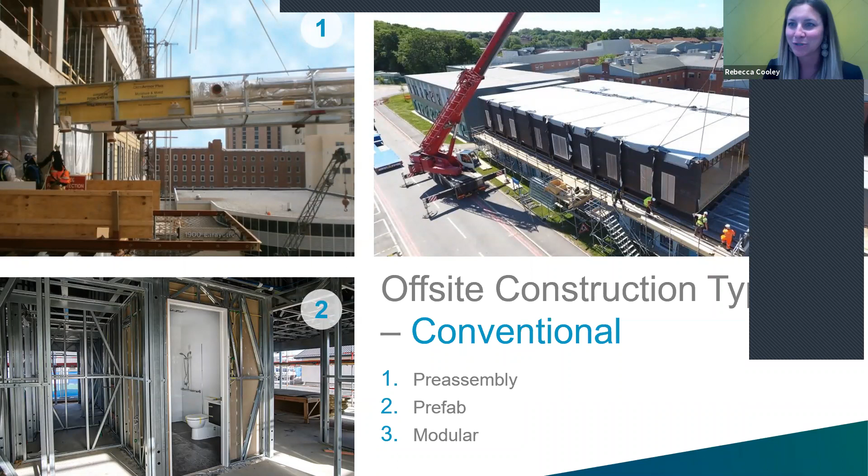The last item on the right is a modular approach, where we're taking an even larger section of that building—here they've pre-assembled almost to the size of shipping containers that they deliver and put in place. These are all different types of off-site construction, but they're not actually consolidating the trades—they're using the same number of trades, just coordinating them off-site instead of on-site, which allows for some benefits, but not all.

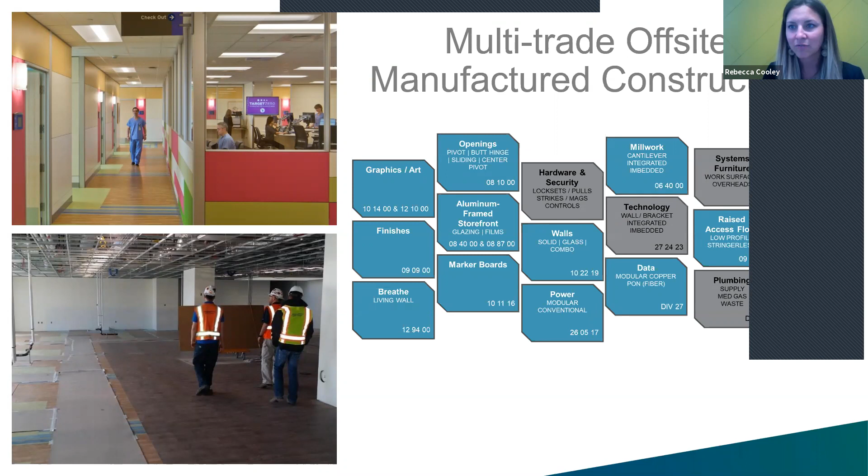Conversely, when we look at the multi-trade item in a manufactured solution, we're combining up to 15 trades through the same type of technology, so we're speaking the same language and using that technology to drive the coordination. We're not having to pull the 15 trades in to individually coordinate them, and we're streamlining that process that would normally be very time consuming. Just think about the contracts alone for all these different trades, that takes a lot of time. Then we're able to consolidate the manufacturing to one facility, streamlining processes and guaranteeing a certain fit and finish level and coordination within that process.

Why doesn't everyone build this way? Number one is people, really just change, and understanding how this process will be different and how it will affect their day-to-day life. It's a very understandable, real reason why we may not work this way.

The other is fear of perceived risk. It's interesting, I had a client, actually a healthcare client, say that with conventional construction, we have a lot of challenges, but we know what the challenges are. With this, it may present new challenges that we weren't aware of. So again, it's that perceived risk of not knowing what you don't know, and changing. And again, this all takes education throughout that process.

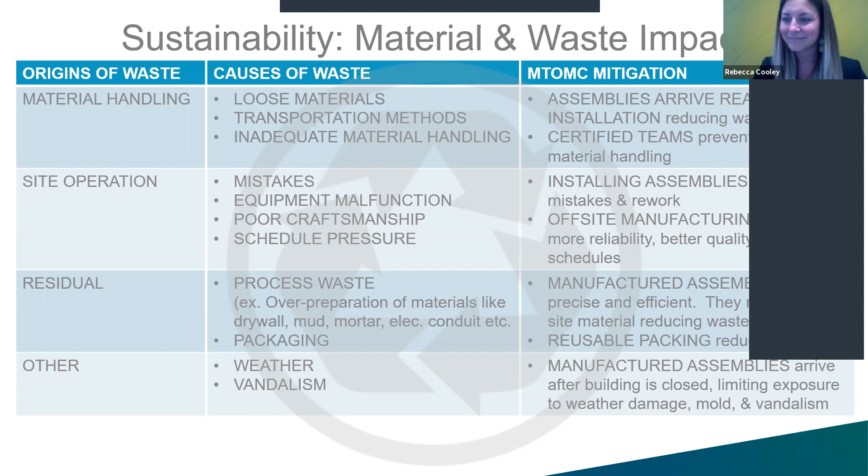Unfortunately not. Okay, no problem. That means I'm answering everyone's questions, just want to make sure that we are doing that.

So that was sustainability in terms of material. Now we're going to talk about behavioral sustainability.

We live in an environment where the way we build now, everything's conventional. So we build it to suit in a conventional manner, and it meets all of our needs on day one. You as architects are doing your best job with all of the information we have to create an environment that is going to last the life cycle of that building, so it could be 5, 10, 20 years.

The issue is that you do address all of the foreseen needs, but the problem is there are so many unknowns, take into consideration what we're going through right now, that there's no way for us to predict what will happen.

So how do we create environments that are essentially future-proof? How can we create environments where we're able to actually access the cavity, add, change, remove, physically change spaces and the way they interact and function very simply, very cost effectively, and very fast?

Obviously in healthcare there's no downtime, so the amount of time we have to take rooms offline could be essential to the community, essential to the business. How can we minimize that impact? That's what we're going to look at too, that behavioral sustainability throughout that space.

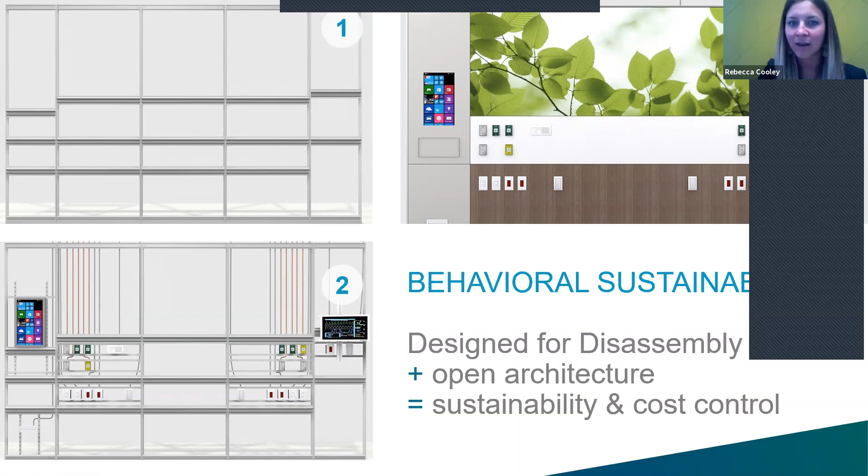Here's an example of a project for Mercy Hospital. This was actually a retrofit within their unit where they came in and wanted to provide upgraded head walls that would need new services through the space. It was going to be more challenging and more disruptive to actually cut into the sheetrock to make those changes, so they decided to do what we're going to call a curtain wall.

They just put that multi-trade offsite construction right in front of their existing wall. That means they did not have to shut down a whole wing to make this upgrade—they were able to come in and do one room at a time.

Through this space, you'll see they're incorporating those three steps I mentioned earlier. We're seeing the framework here, we're seeing the gases and services coming through the space, and then obviously the finishes and what is that aesthetic and durable surface we're using throughout that space.

This whole project had 29 rooms, and it actually only took 2 days to complete with only 4 men. So the schedule has a big impact that we're able to help drive the needs of that healthcare system, again, not being down for an extended period of time throughout that space.

So as a synopsis of sustainability: it's faster, it's greener, and it's better. I like to say faster, cleaner, smarter. The faster portion is that if we are building things in a sustainable manufacturing method, we're then using less men.

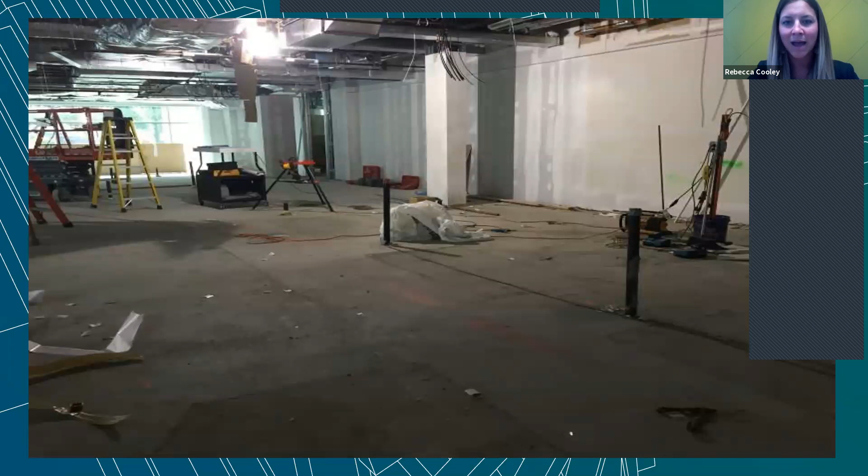On September 1st, they were cutting through and cutting out floor coring for all the plumbing needed throughout this space. It was currently a shell space, just to give you a little more background. They were cutting into the existing concrete, running all those services overhead and underneath. Now they're pouring back the slab within that facility. So that was September 1st.

So from October 31st, they have the warm shell created. It took them 60 days to go from a cold shell to a warm shell, which would include running everything overhead—life safety, HVAC, some low voltage was run. We have the ceiling grid in place and the floor covering. Now you can get a great sense of how we are impacting the other trades, from schedule savings, decreasing the waste needed on site, and also a sustainability factor.

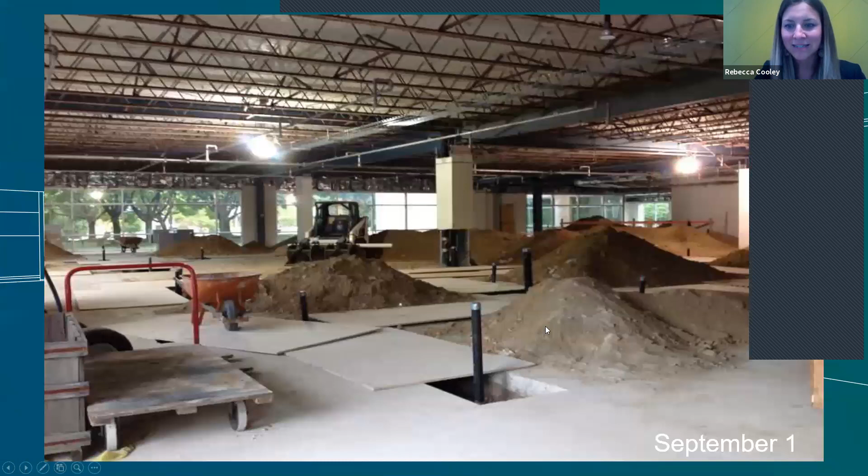So this ceiling—instead of being, let me go back to that floor plan so you get an idea. Hey Rebecca, really quick, we do have a question.

Which division are these components specified? And were all these components part of the modular headwall?

Great, yeah, let me go back to that image. That's a great question. So all of the items included in the multi-trade offsite construction are in one division—Division 13. That's under special construction. The name of the section is Integrated Interior Assemblies, and it encompasses everything that you see here.

The items that would not be included would be this monitor. This is an Epic system that the healthcare system has standardized on. So we just accommodated the blocking, the installation, and the wiring for all the AV. That's one item that would not have been accommodated.

These med gases that you see here—we are not producing these from scratch. The healthcare system would tell us what type of med gases they want to use in the space, whether it's Amico or a similar system. We would source them and then provide either a flex med gas solution or a copper solution within that wall frame. This thing came straight from the factory that way, so all of the trades are again encompassed in our factory.

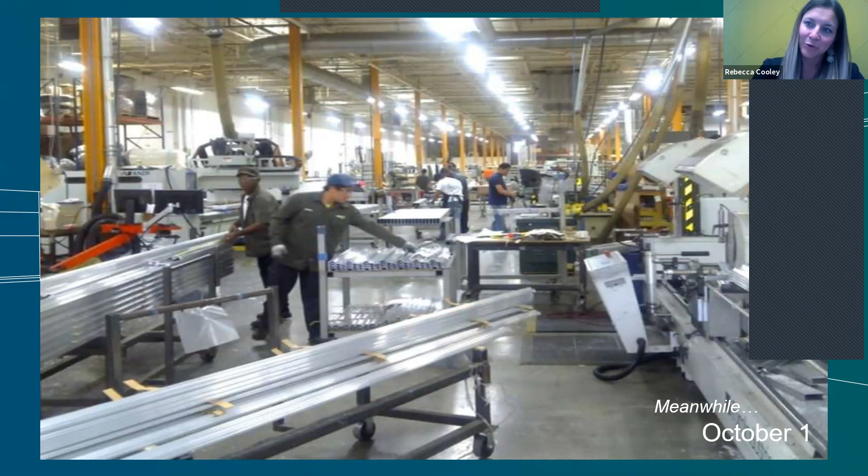We are starting on November 1st with the multi-trade onsite. Meanwhile, we back it up four weeks before that, starting to build all of those elements you see there. All of the elements in Division 13 use that technology. We're driving our equipment on the manufacturing floor, cutting all of these items and pre-assembling them.

You'll see here our framework. You can see they're putting in the insulation. They're lining up all of our power outlets that are pre-wired, and we have a plug-and-play whip connected to that.

We're then going to start on that November 1st date. We bring in all of our frames and start standing those items. So from November 1st to November 4th we have all of our frames installed. It took three days to go from completely open space to enclosed spaces.

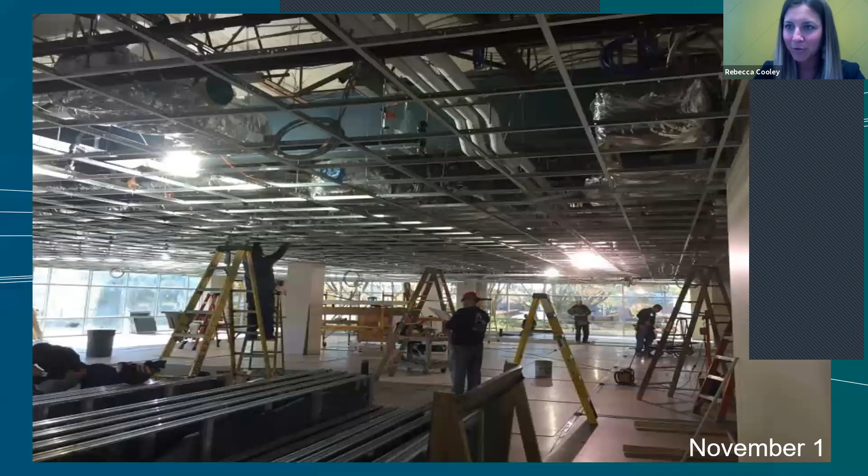This is generally when people are very worried, because normally they just like to see progress, right? And this is when people are blown away -- they're like, 'oh, I get it now.' That's part of that adoption, going through a process. We do have to take a couple steps back in order to then go ten forward, just to gain familiarity with the different process. So we've now stood all of our frames.

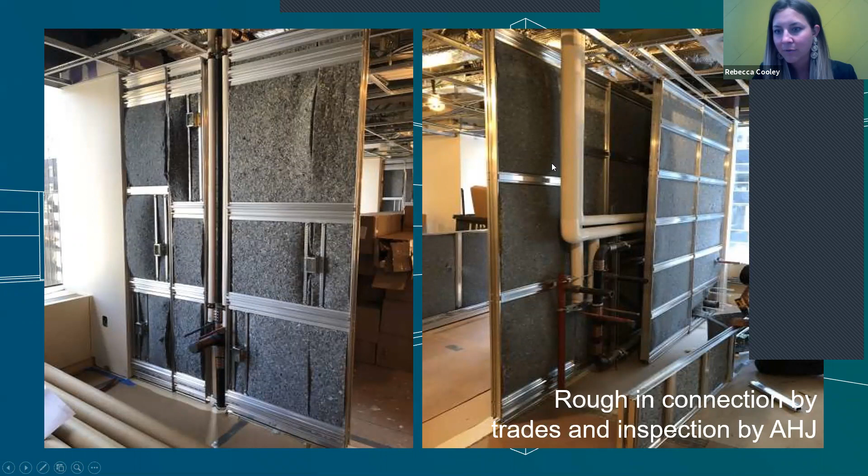We're making all of our rough-in connections. You can see we did not embed the stacks for the plumbing, but we're just accommodating those. You can see some of the larger horizontally run plumbing here for the restrooms. And then you can start to see our finishes arrive on site.

These finished panels or tiles actually have holes cut in them from the factory, so all of those items come together perfectly in the field, and we snap them on in place. As simple as the tiles snap on in place, we have a tool where we can remove the tiles, and that's what allows us to have access to that cavity.

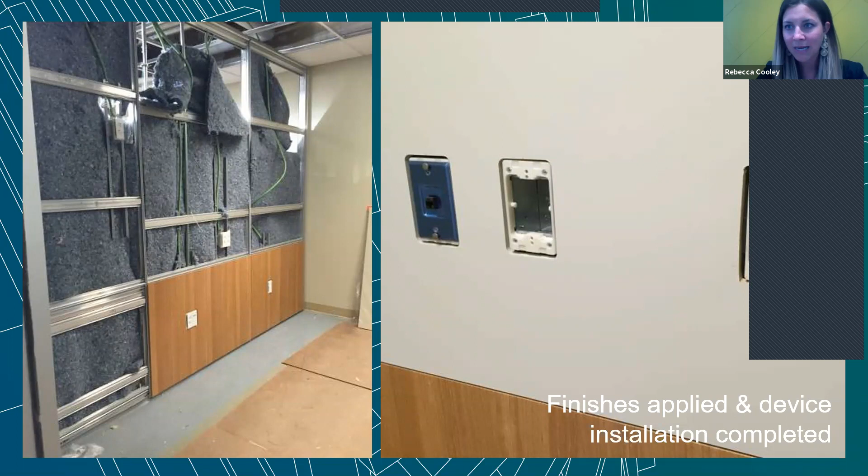So all those day 2 changes where we may need to accommodate a new piece of equipment, or we need to accommodate new oxygen because we're under a crisis, we're able to do that within 30 minutes with one individual trade.

Here you can see we're starting to install our millwork in the space as well. All of these items have been coordinated, so the blocking is already embedded from the factory. The electrical is behind the cabinet to accommodate a piece of equipment, and all of that's being put in place.

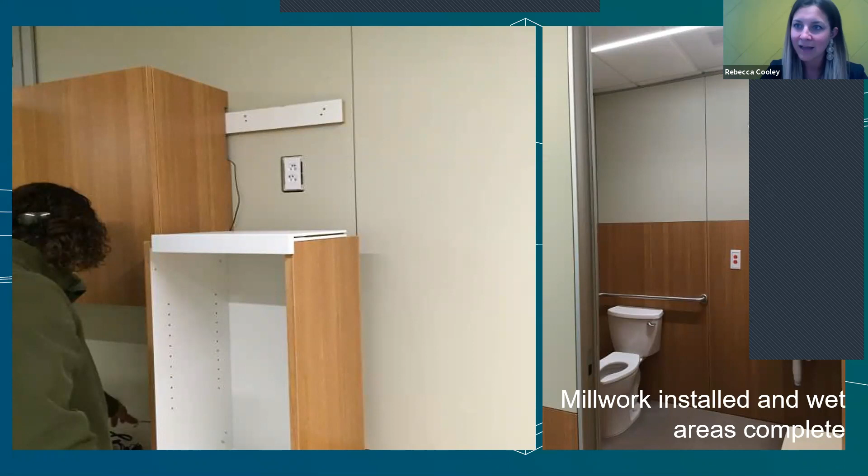And then in our restrooms, again, we had blocking accommodated for handrails. The beauty is that we always have access to the cavity. So if some design changed within those 4 weeks, we can just remove that finish tile and add a 2x4 to accommodate blocking, as opposed to cutting open the sheetrock and then having to add the blocking, patch, paint, etc. We're trying to streamline the amount of coordination and trades so that everything is more seamless.

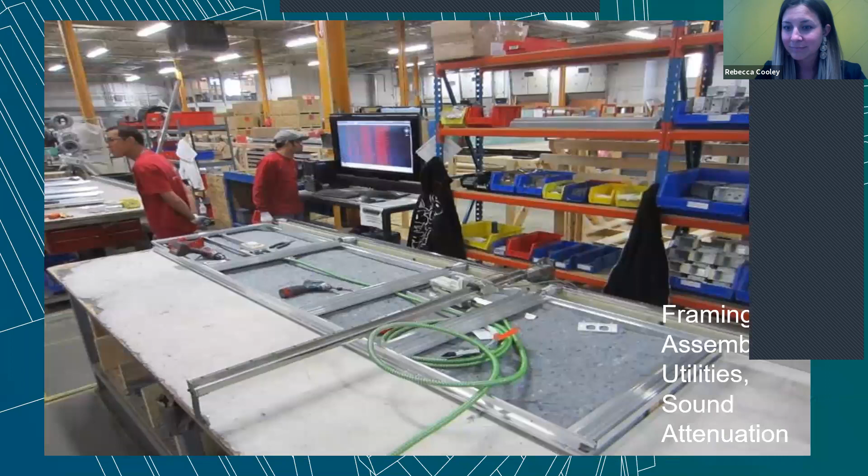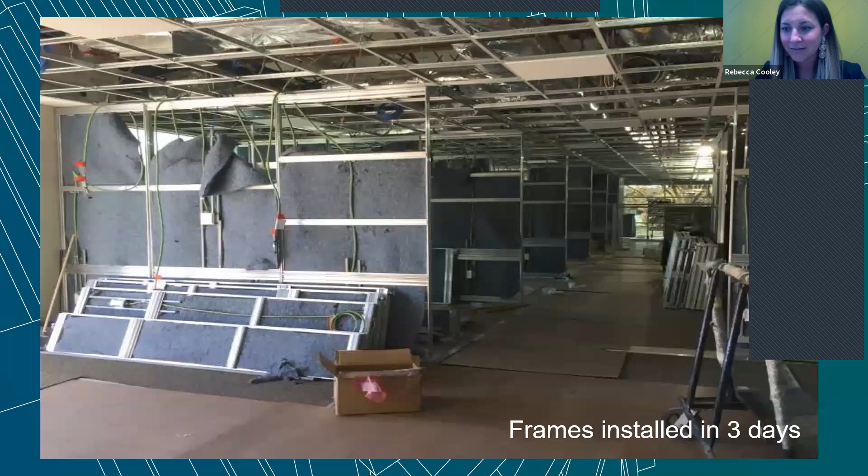The other thing I'll point out on all of these items is that everything has a 10-year warranty. So again, making sure that we're protecting the investment of that healthcare facility over the life cycle of use. As most of you know, you get a 1-year warranty on conventional construction, so a 10-year warranty is very beneficial, especially since these are generally high abuse, 24/7 facilities.

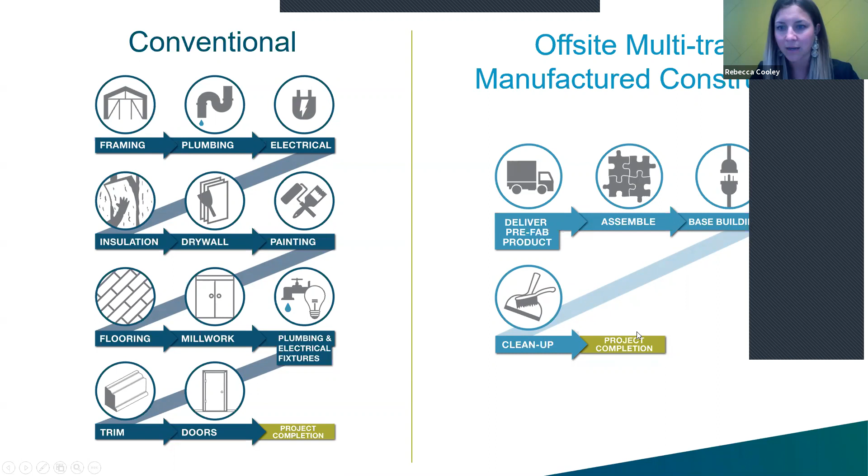So as we start looking at that schedule, first we'll just look at a conventional construction schedule. How are we impacting those trades that I keep talking about? So you'll see here that this is a 17-week schedule, so it's pretty good. And we start to see how each trade is dependent upon the trade before them, right?

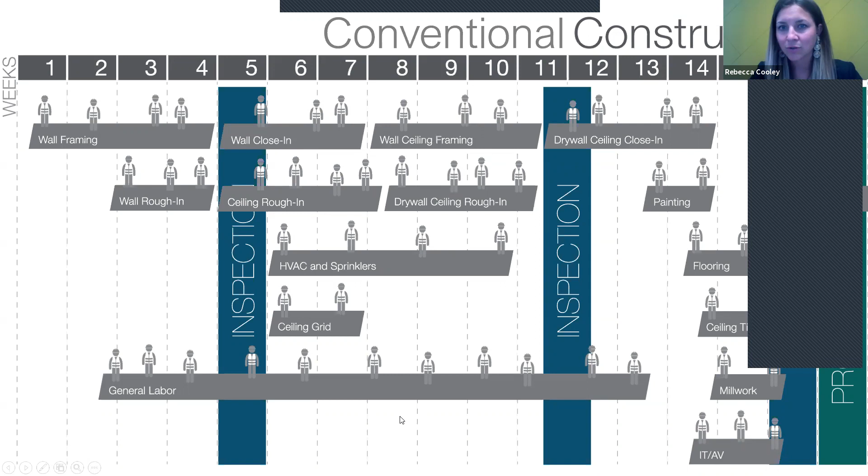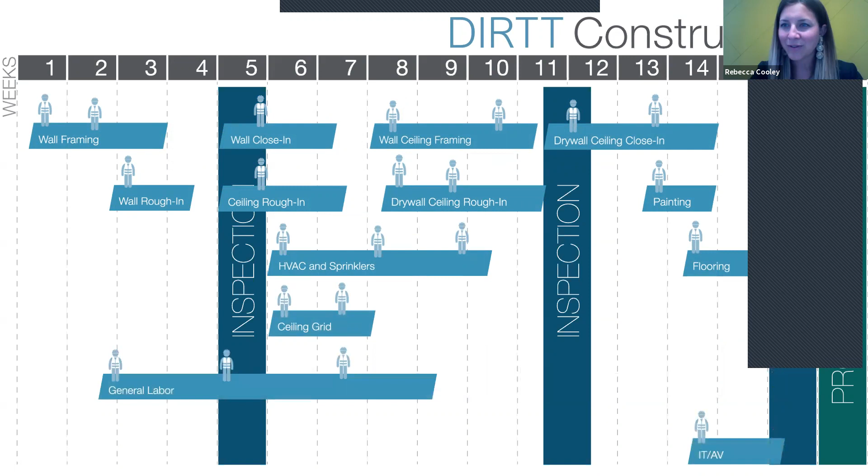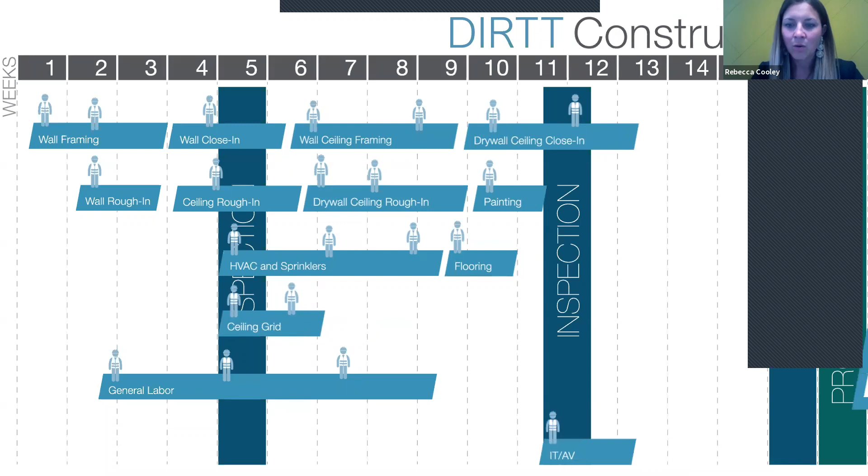We're going to go through. So if we look at the 17-week schedule conventionally, and then conversely, how would it look if we built it with a manufactured construction solution - we still have the same number of most of the trades here, we're just going to accelerate their schedule. So if we start to bring those items a little bit tighter together, we're also going to change the sequencing of our floor covering. Generally floor covering is last; we're now going to move that earlier up in the schedule. And at the same time that they're building out a more accelerated white box, we're then generating all of our items off site. So therefore that 17-week schedule is now a 14-week schedule.

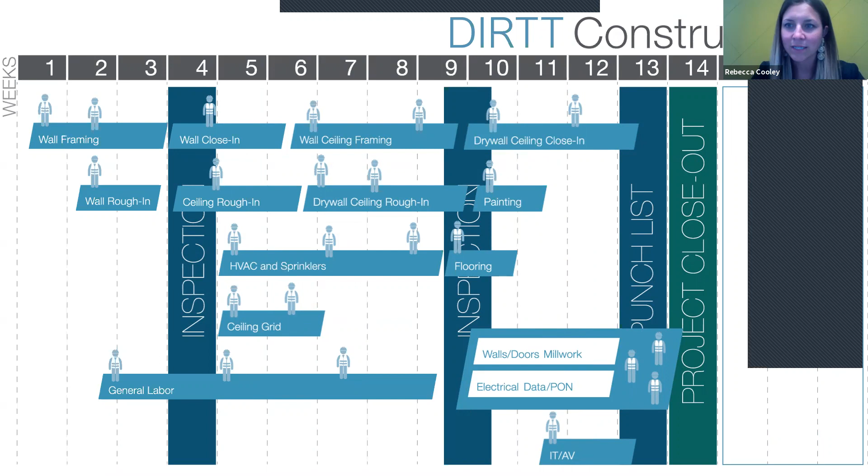So I'll pose to you guys, what would that mean for your client to get into their space 4 weeks sooner? Would it mean they could generate 4 more weeks of revenue? Would it mean they could get out of a swing space? Would it mean we could accommodate some of the newer technology to allow for new services we couldn't accommodate with our old space? What would that mean to your client, the 4 weeks?

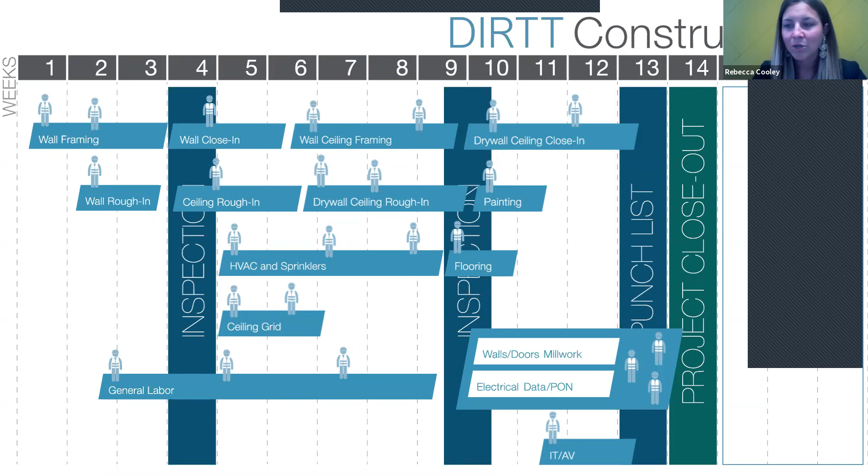And really this is how we're able to do that. So we'll talk a little bit about the process and the way that you guys, the architecture and design team, is going to play a big role in all of these items that we've mentioned.

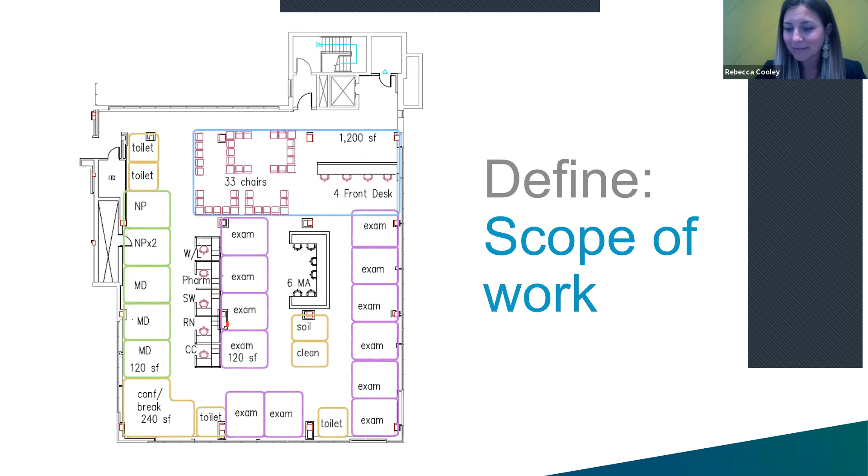So the first thing is, how do we define the scope of work? The scope of work is generally anything except for the exterior of the building or any item that's fire rated at the moment. Other than that, we can build out the space.

We then will take your design, we'll take your floor plan, and pull that into a software platform that's really that technology piece. This is the game changer. So we're going to take your design in, we're going to build that item in our BIM-like software. And this is how we get all of the information that we need early: constructability, engineering requirements, cost, and so forth.

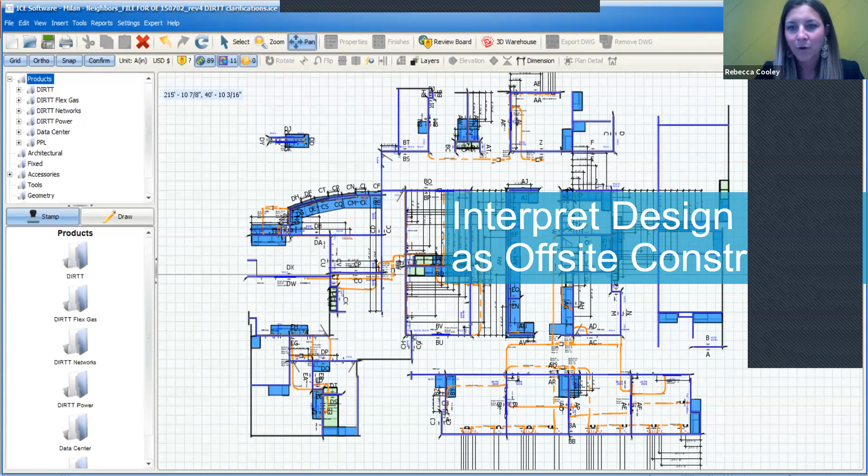We're able to, as I mentioned earlier, be an extension to you guys and take some of that production work off of you so that you can spend all of your billable hours doing things you actually enjoy doing. I want to see in the chat who loves doing millwork sections. Let me know. Who also loves writing CSI specs? No one, except for the one spec writer in your office. So what we're able to do is take some of those items off your plate.

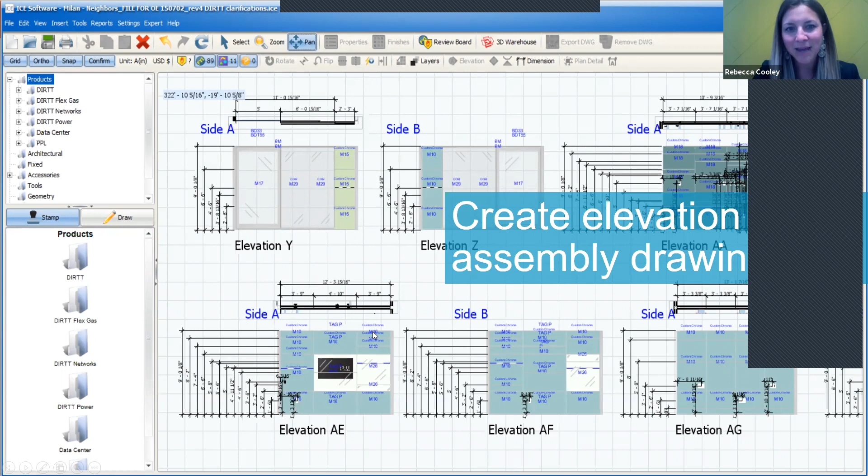So we're building these elevations for you. You can see they're very detailed, with dimension plans, elevations, embedded technology, door schedules, everything down. We're also able to create those visualizations as well. This is a big part of integrating back with your base building design, making sure that's coordinated, and also providing tools very early on so that you can get answers from your ownership group.

I think about 5% of people can read and understand floor plans and elevations in 2D. So giving them these tools so that they can understand what the design looks like, and we can get answers quickly, and they feel confident in giving you answers. So hopefully we won't have a lot of changes in the future.

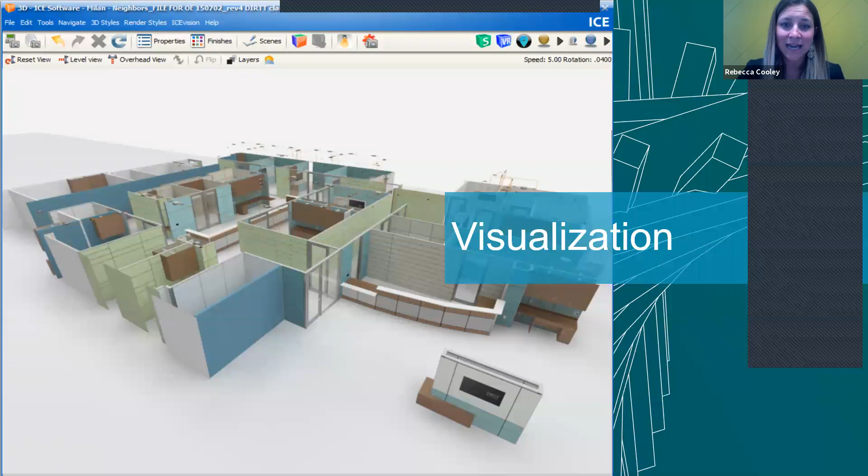And then behind all of that is really the manufacturing and engineering. So we're just looking at pretty pictures when really all the CNC code is written. If you and the client said yes to this, we would be on site in 3 weeks actually building out your space.

So this is what allows for our completely custom design and a more systematic approach. It also is giving us all the pricing to the penny. You can see all the bill of materials. It's also generated, and it's that cost certainty.

How will you sort of guarantee cost certainty throughout the project, during the design phase, during the construction phase? It's very difficult to do, and a lot of us just depend on the general contractors to manage that process. But what if we had a tool where you could have more control over that?

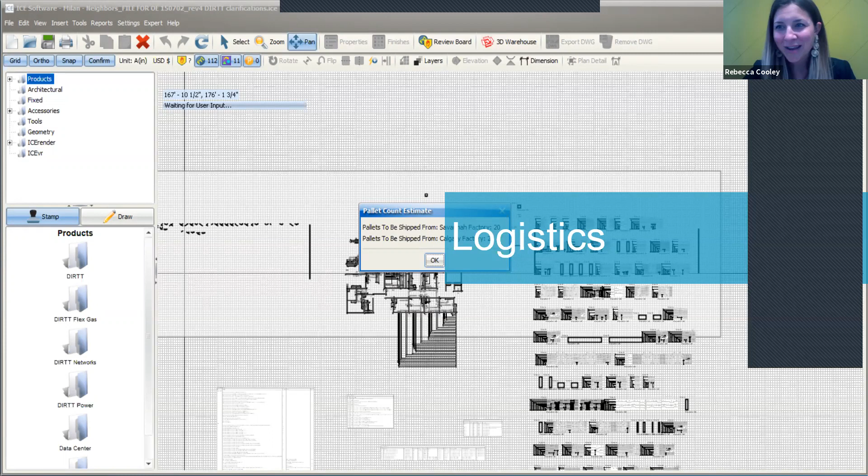And then obviously it has all of the logistics. So where are we shipping it from? When is it getting there? And how are we going to be entering your site? How will we be working with the individual site logistics, with all of your general contractor?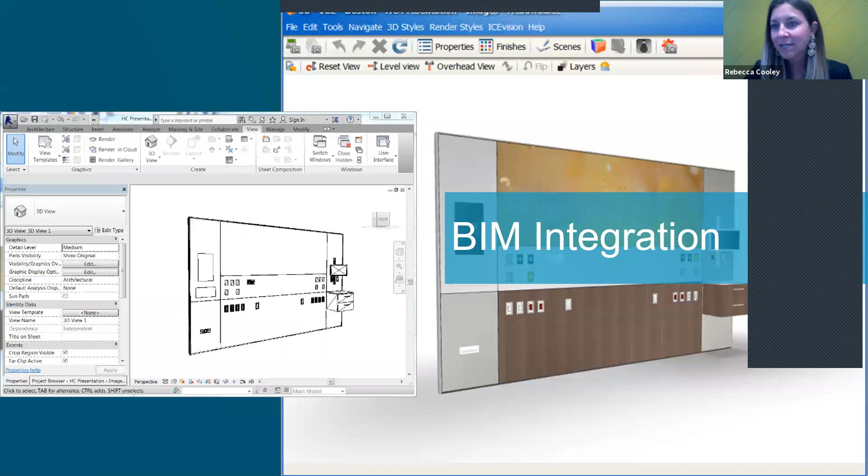We're also defining responsibilities. So the biggest thing with electrical is defining whose item is in whose scope. And again, that's very important when we're talking about pricing, and we want to define that early, and we want to have those conversations with your electrical engineer and your electrical contractor.

I had an early question about specs. You beat me to it.

So we can provide early narratives with the multi-trade approach. This is just an example of some narratives that we can provide during SD. And then we can also get into more of the detailed CSI spec in Division 13.

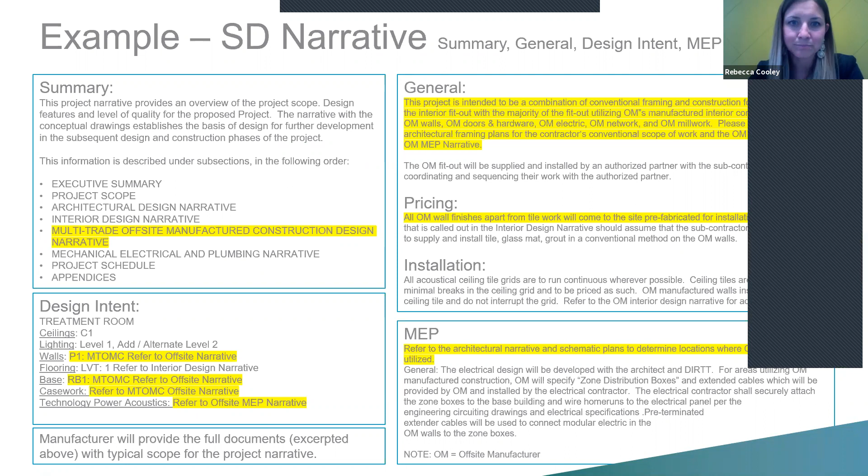Now, this is the big key takeaway I want to give to you guys: how do we provide our drawings to make sure they understand it's multi-trade? The key thing is you just remove it. So anything that the general contractor is not having his subs build would just be removed.

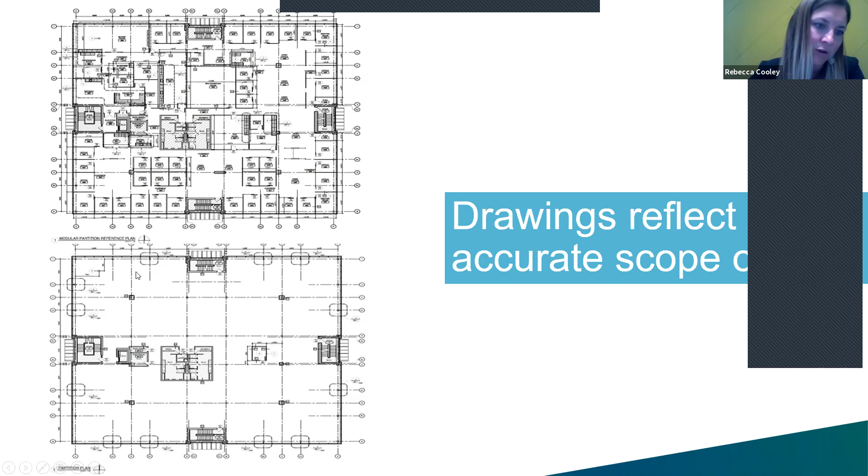So the top you see is a general floor plan, how we typically see it. The one below that is with all of the multi-trade offsite construction removed. That's a big difference. So this is how we can communicate properly to our floor covering sub, that it's just one large space. Our ceiling sub, one large space. Electrical, the list goes on and on, is how we communicate that.

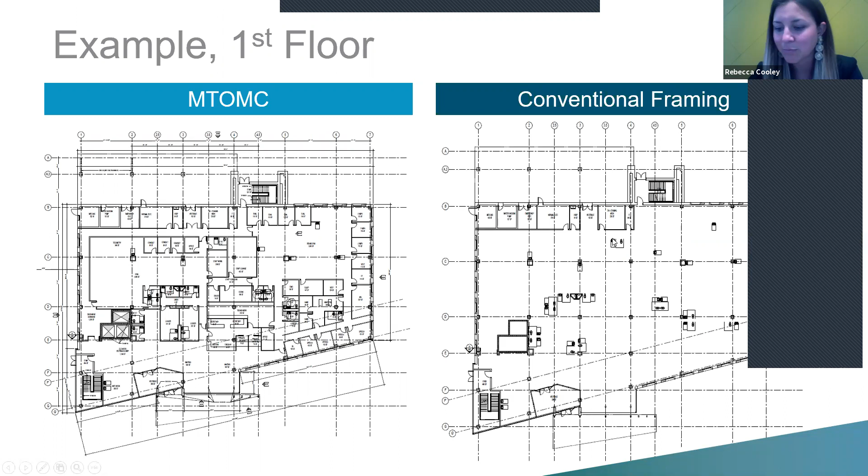So if we look at a couple of floor plans, we'll see how we're approaching that. So any of the fire rated walls would not be included. And generally, if there's a core to the building, it may have stairwells, which are fire rated. It may have janitor closets. It may have IDF rooms, electrical, and some of them have larger restrooms. That may be something that's pulled off. And so you can kind of see how we're exhibiting that.

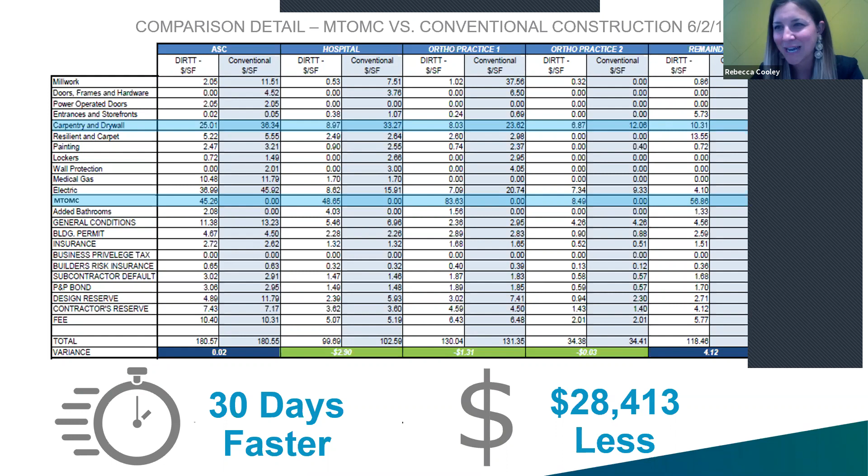We also can provide cost estimates. We have these on many jobs that we've completed, healthcare specific and otherwise, to show how much faster we can get someone into their building, and what that means in terms of dollars. It's also a resource that we can provide with the offsite construction method. And it's also showcasing that the comparison is very in-depth, and again, it needs to be done at every level of the trade that we're impacting. So it's not just looking at sheetrock.

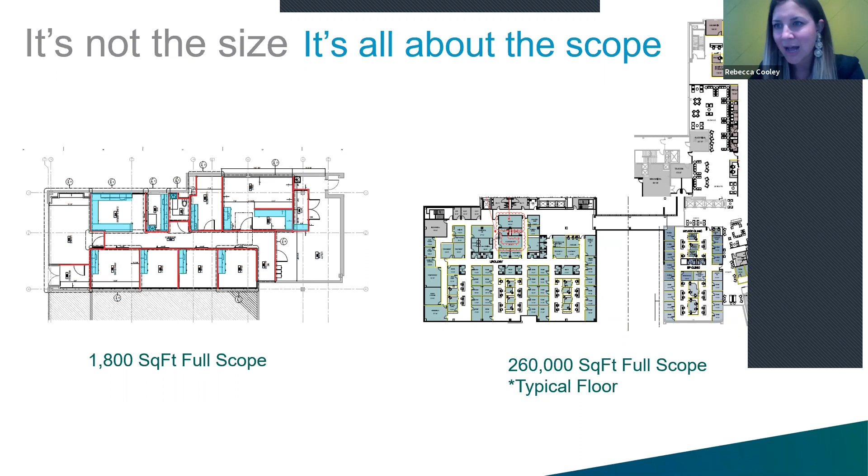And the other thing I would say is it's really about the scope. It's not about the scale of the project or the size of the project. It's about the method and the approach that we're taking to the project. So whatever we can do to provide really those two spaces. You want to have just a wide open space. We want to create a ceiling and a floor plane, those two horizontal planes, and then leaving that wide open space for us to come in and build efficiently and also create the most flexibility moving forward for your client. So it doesn't matter if it's an 1,800 square foot space or a 260,000 square foot space, it can still take into account all of those benefits. And we can talk through that with you guys.

So in summary, the biggest benefit we can provide here is speed to market, which every healthcare owner is concerned about. We're maintaining cost control, so the costs we give you at the beginning will have visibility and transparency all the way to the end, and that cost should not fluctuate.

There is flexibility inherently, so whether we're accessing the cavity to add a new outlet or having to physically change the spaces and reconfigure them, we can. We want to have that life cycle impact as well, and then the sustainability aspect of it, not only material but also behavioral.

All right, so with that, I know we're getting to the bottom of the hour, so I'm going to open it up to see if you guys have any additional questions. We did have one other question come in, and I thought I'd leave it to the end. The question is, how much time did you spend with the designer during the design phase for this project versus a similar project which used conventional framing construction?

I think the question might be referring to whether it takes longer to design. Because if we're not using offsite construction, I wouldn't be spending time with them. But there is more planning up front from the front end. I'd like to say it's a systematic approach as opposed to a rigid approach or specifying a product, right? Because we're building custom, we're just using a system to help streamline and make a more efficient process from design, manufacturing, and then installation.